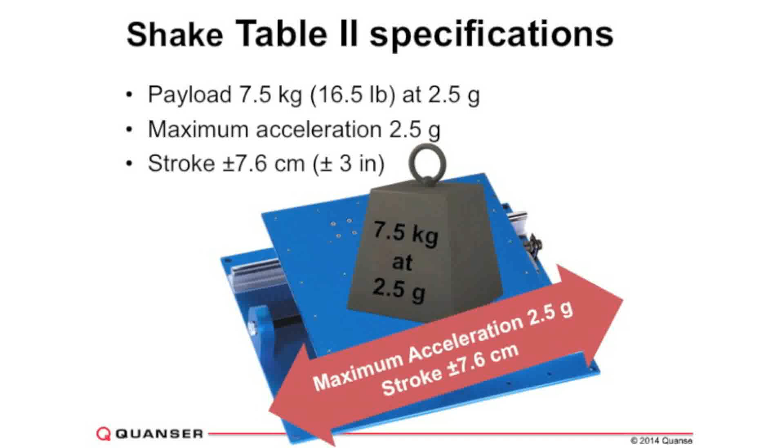And we have graphs that we can generate, based on the load you have, showing how much you can accelerate it, and so on. The stage stroke, so if I go down here, the stage, I'll just be moving manually, has a stroke of plus or minus 3 inches, so plus or minus 7.62 centimeters. So that's the stroke that you have.

The next item is the bandwidth. The bandwidth can comfortably go to 10 hertz. At small amplitudes, we can attain 20 hertz. So those are the top 3 specifications we get asked. So now I'll be going through the actual hardware of the Shake Table II. Mind you, this is a demo system, but the hardware is no different.

So we have a 400-watt 3-phase motor right here. So it's a very powerful system and it's ball screw actuated, so very robust. It's riding on 2 ground-hardened shafts, as we show here. In terms of sensors, we have an accelerometer that's mounted right here underneath the table. So it's an XY accelerometer that we manufacture.

We have an encoder that's embedded inside the motor. So the encoder gives you position feedback. And I believe the resolution is about 3.1 micrometers. So very high, very accurate position measurement. Next are the limit switches. So there are 3 limit switches on the table.

And if I take this to the left, then that will trigger a left proximity switch or limit switch. There's a home. The home is the center stroke position. And then we have the right. So 3 limit switches. And those are used for 2 reasons. They're used in normal operation. They're used for safety measures. So if you hit the left or right limit for some reason, then it will deactivate the amplifier.

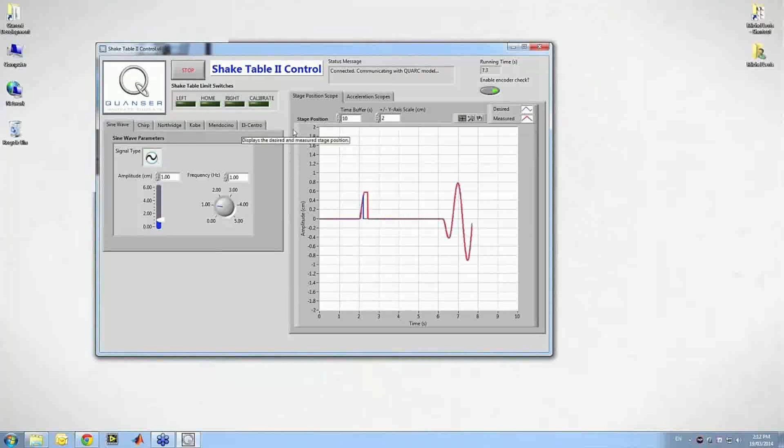All right, so let's begin with the first software option, which is the Shake Table II software. So I'm just going to load this up. It's just an icon you have here called Shake Table II software. If I double click on it, then it launches this graphical interface. So it automatically calibrates the system. By that I mean it automatically homes the system for you. So that's just another step that makes it easier.

As you can see, I can change the amplitude and the frequency of the sine wave. So I can decrease it and then start increasing the frequency, for example, to 2 Hertz. And all things are done in real time, where I can increase the amplitude. So these are things you can do as you're running the system. This is the position being shown, so it's showing the desired and the measured position. You can change the scale, the scopes, and so on.

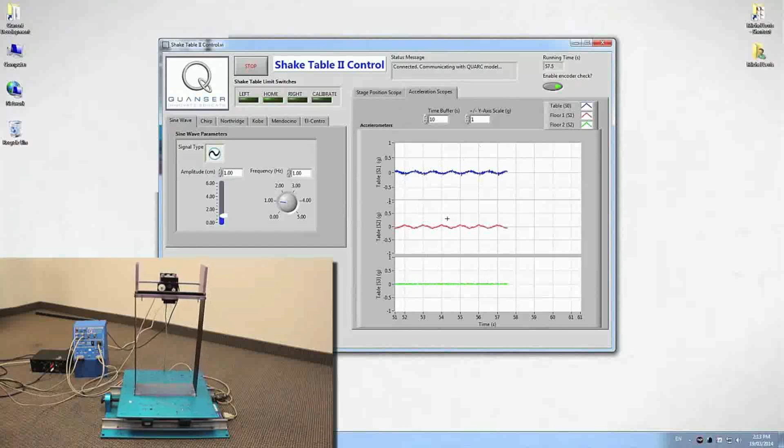We also have the acceleration measurements of the table and as well of any other accelerometers connected, including the structure. So the blue line here will be showing the acceleration of the table. So if I increase this a bit to like 2 Hertz or something, then you'll see that increase. And you'll see that the acceleration of the top stage in red increases as well. So if I decrease the frequency, it goes down.

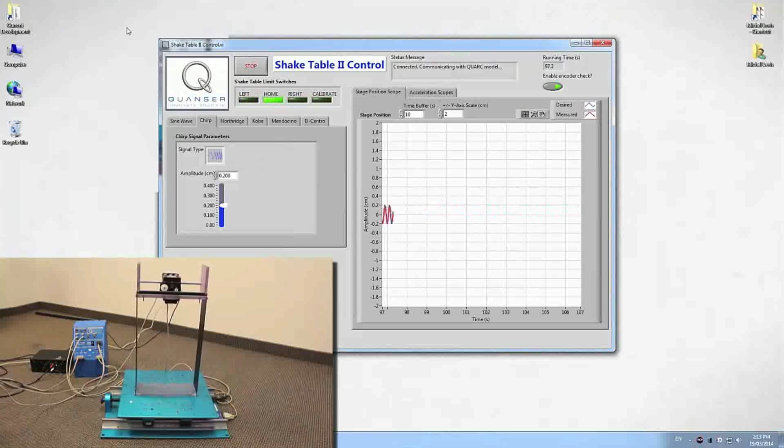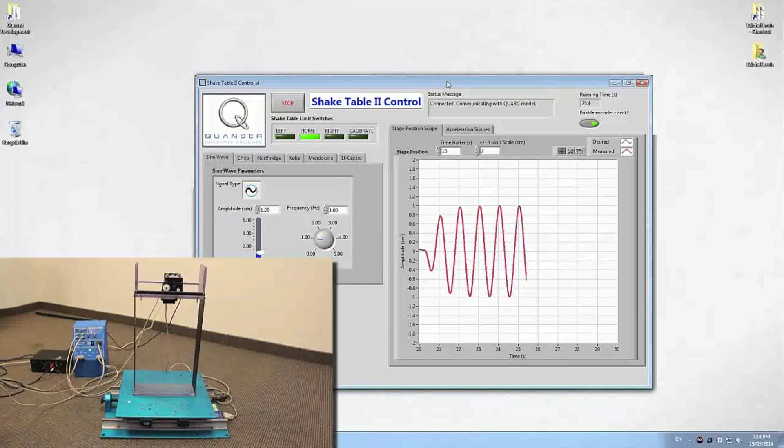Okay, so now I'll just restart that. So see, it calibrates it, makes it home, and then it'll fire up the Northridge system. So that's an example of an earthquake that's scaled down and fitted for the table. And if I go back to sine wave, then again, it'll make the smooth transition to the new signal and switch it off. And then I can click on stop, and the system in your lab is done.

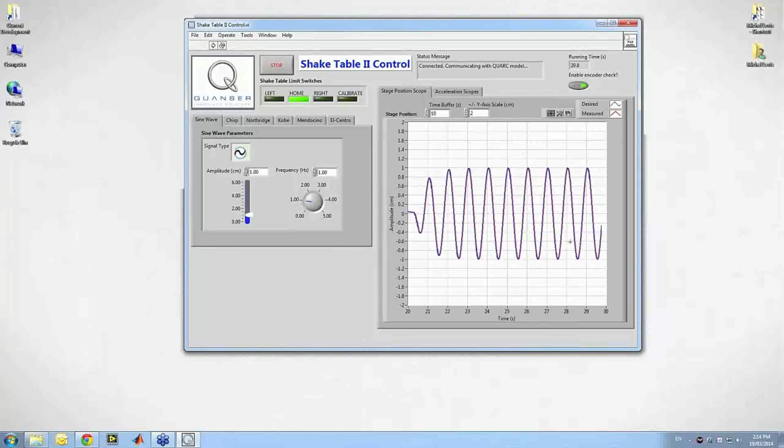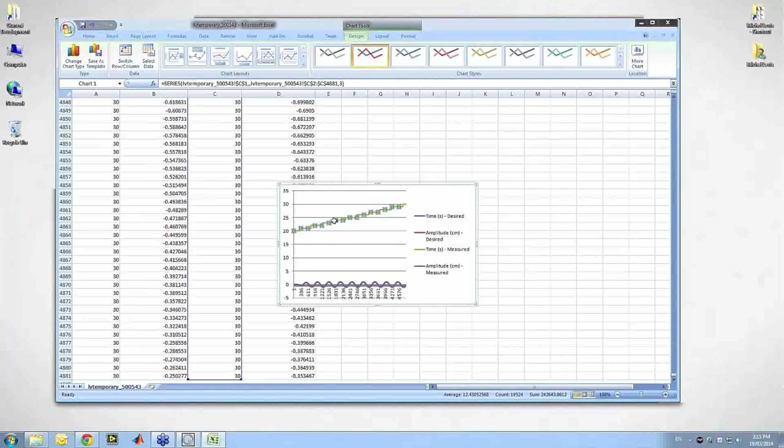So a couple of things here. If you do have LabVIEW on your system, then you can export this into Excel. So I can click on the position here and say export data to Excel, and it'll automatically just put it over to an Excel sheet. So then you can use all this data here, for example, and say, insert a line graph. Just delete the time here, and then see this shows you the data. So you can save data in Excel very easily if you have the full LabVIEW version installed. I don't think it does it with LabVIEW runtime only, but anyway, that's something to consider.

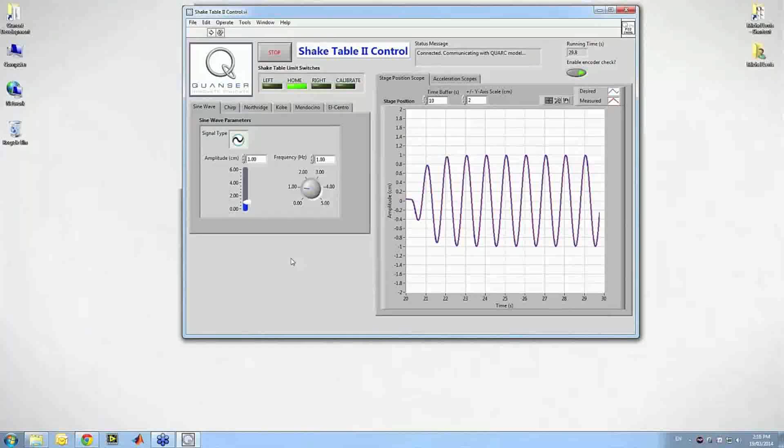So like I said, it does everything for you. It initializes the amplifier, it centers the stage, and it's easy to command different signals. What it can't do is, you can't add new earthquake simulations, you can't modify signals, and so on. It's a closed architecture type software. Now, if you want to do some modifications, that's where the MATLAB Simulink QUARC solution comes in, which is what I'll show next. But yeah, so that is the Shaketable 2 software. So I'm just going to close that, and then I'll show you the second method.

So this method is all based on MATLAB Simulink. Now I've trained a lot of people on the Shaketable system, and I find it's pretty much 50-50. Not everybody uses MATLAB Simulink. I guess it just depends on the institution. So if you haven't seen it before, then it might be a bit much, but I'll go slowly.

And hopefully, most of the controllers here are running in QUARC, so you don't need to know too much about MATLAB Simulink at the moment, but at least this will be an intro to you, so I'll try to give you a bit of a primer as I'm doing this, because I am aware that some people don't use it that much. So I'll just start over with the MATLAB Simulink.

So in option 1, we saw the software, so now I will show the MATLAB Simulink solution. And as I was saying, some of you might have been cut off with the audio. I'm aware that some of you may not be familiar with MATLAB Simulink, but that's fine. I'll try to do my best to give you a bit of a primer as I'm doing this. But basically, MATLAB is a text-based mathematical language.

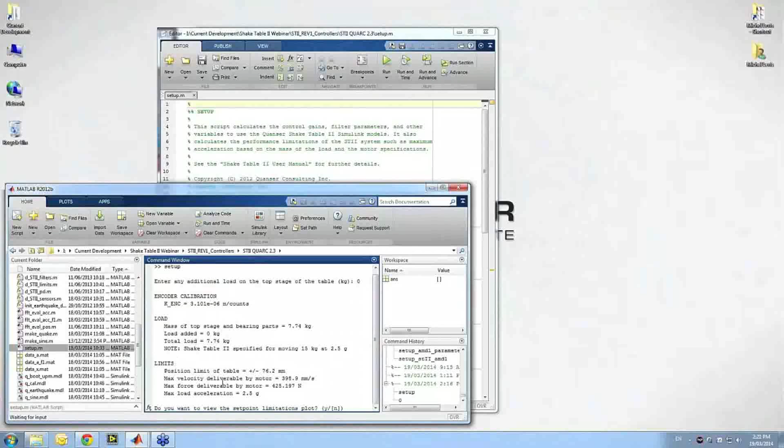you entered, for example. If I click on yes here, if you want to view the set point limitations, so by set point limitation, that means basically it's the bandwidth, right? So the bandwidth based on the payload, what position can it command, and at what frequency for a sine wave. So if I maximize this, then it shows you what acceleration you reach depending on the command you give. So the blue line is the limit for the position, the red line is the limit for the velocity, and the green line is the acceleration limit. So I'll just maximize this again.

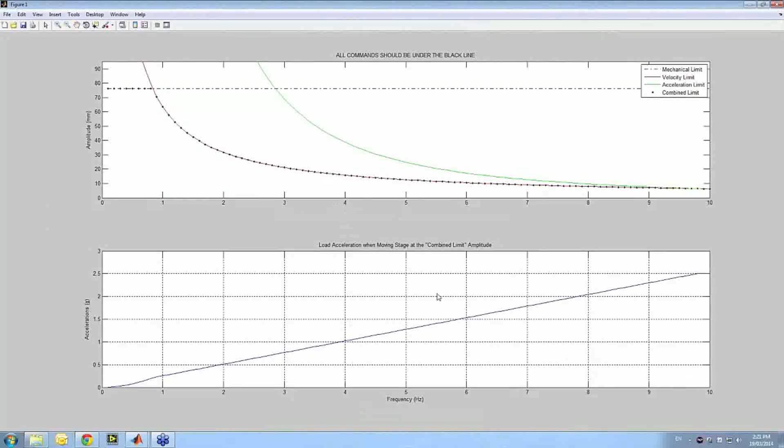So this is Simulink, the block diagrams that we use. So again, all these files are supplied with the Shake Table system. And the nice thing about this is, if I double click on here, these blocks here are actually made by us. So this is part of the Quanser software. So QUARC works with Simulink. It's quite seamless, but what it does is we add some blocks to interface to our hardware, but it also allows you to generate code from the Simulink diagram and run hardware. So those are 2 key things that it does.

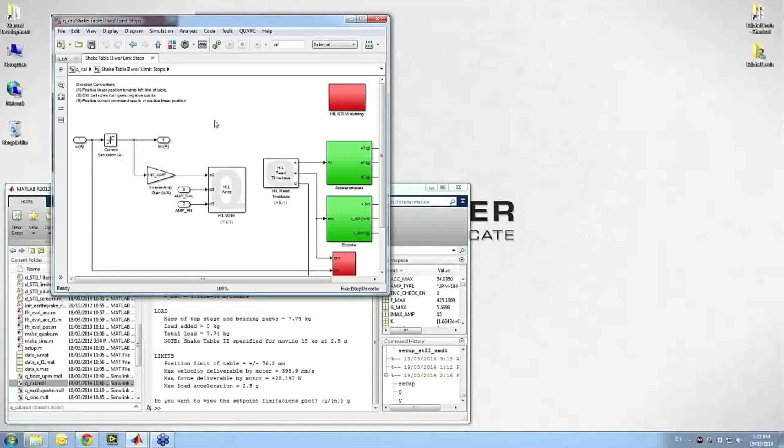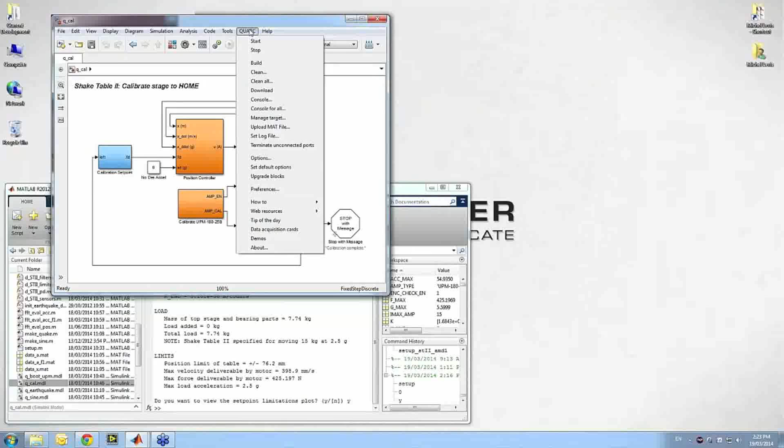Simulink is a great environment for modifying controllers because it's more concept based and all that. So if you want to change the signals, it's quite easy to do it in this platform. But for now, let me just show you how you would calibrate the table, how you would center it using this approach. So the first thing you gotta do is you go to the QUARC menu. This is another thing that gets installed automatically once you have it set up on your system. So you go to build. So what that does is it generates real-time code from your Simulink diagram.

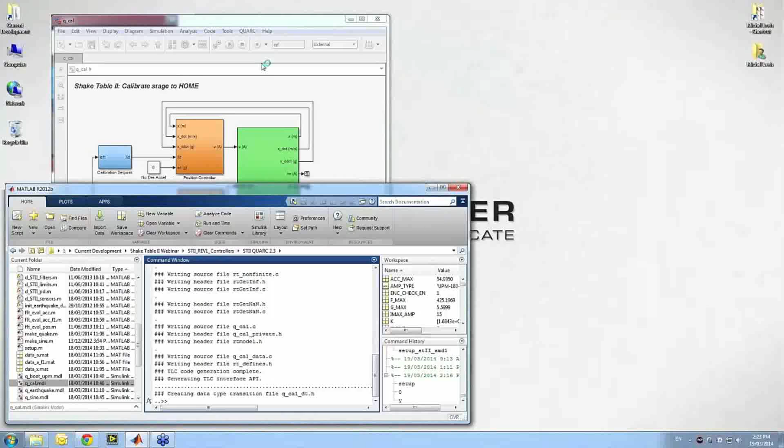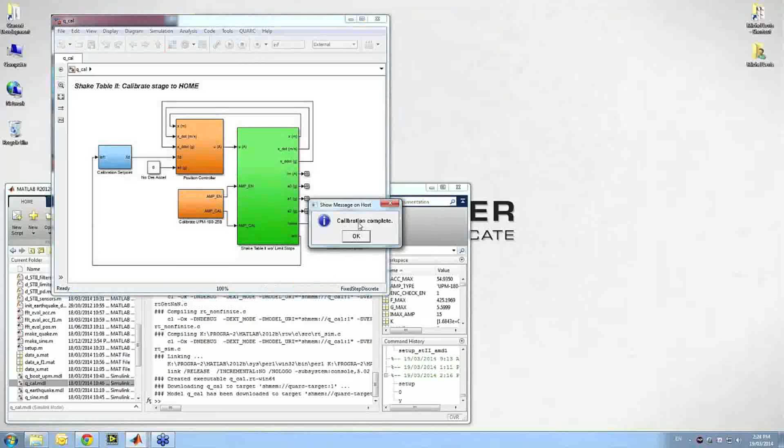You'll see in the MATLAB prompt here, generating code, and it'll go through the different prompts, and at the end it'll say downloaded controller. So it's finished compiling, and there. So model QCal has been downloaded, and now we can run the controller. Because right now it's not actually home, so I can go connect to target and start, and then it'll go over here and center the table for me, and then it'll prompt a message saying calibration complete, and so that's good.

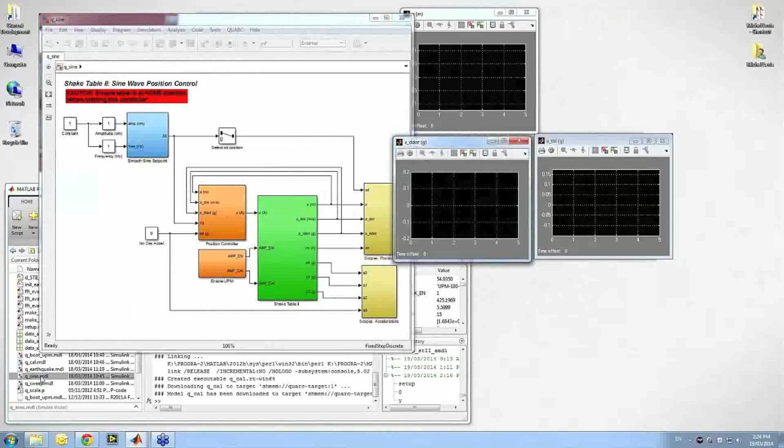If you didn't do that and you try running another, like the sine wave controller, it will prompt you to say, hey, make sure you center your stage before running this controller. So it has all these safety measures embedded inside. So let's open QSine. So this commands a sine wave to the stage. So this is handy for different reasons, right? Because most people want to supply a sine wave.

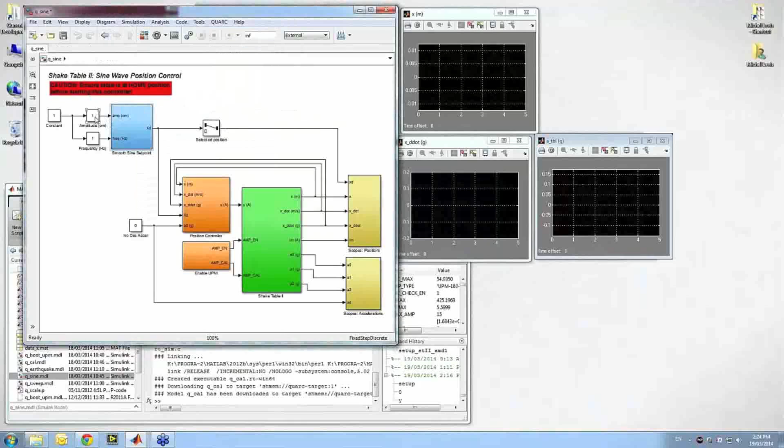But again, the sine wave in here, if I double click, here's a sine wave. So you can easily change that to say a square wave. If I go here and I say square or triangle, then you could do that. And of course, we would have to change the amplitude and the frequency of that different signal. But just showing you how easy it would be. So I've already built this controller. I've already generated the code, so I can just go and start. And there we go.

So just like in the software, I can go ahead and change my amplitude to 1.5. Or I can change it back to 1. Change the frequency. So all the same stuff I've done in the software, I can do through this, but it's a different interface, and you have that capability of modifying the diagram if you want.

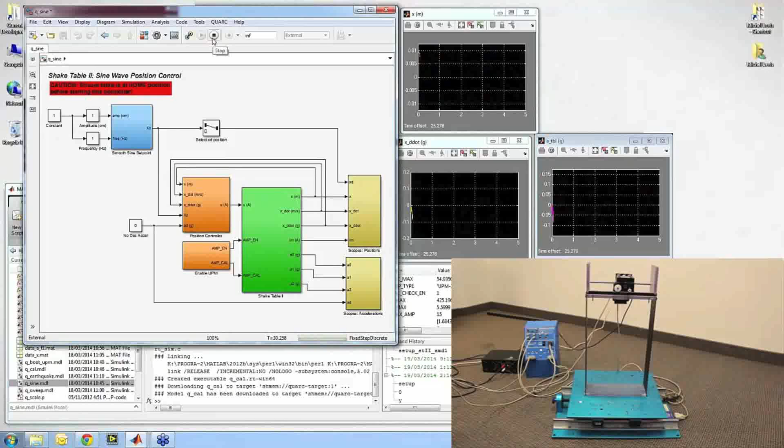The other thing is also you have scope. So here I'm measuring the position. This is the acceleration of the tables. This shows the acceleration. It's pretty low right now, so it's not showing you a great amount. And then when you want to stop the controller, you just simply click on stop.

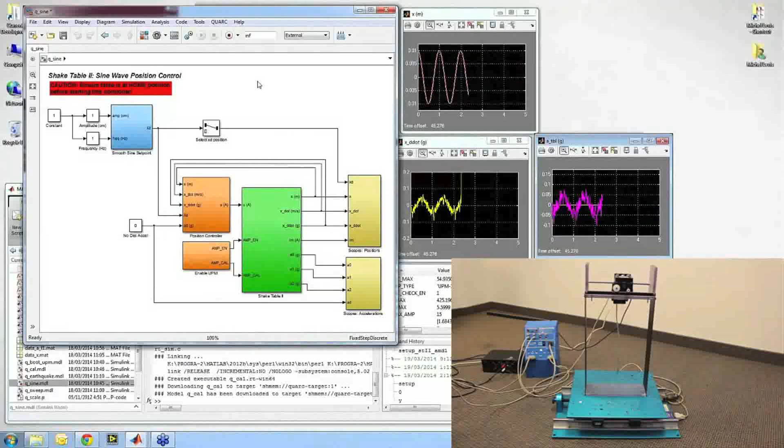So that's the sine wave. So I'm going to click that. I won't save. Now the next one. So we've already kind of touched on these different controllers. The next thing I want to show is actually how you can save data in MATLAB. And as I was saying, actually I will probably save that until later. Right now, maybe I'll show you the earthquake and how you can simulate different earthquakes.

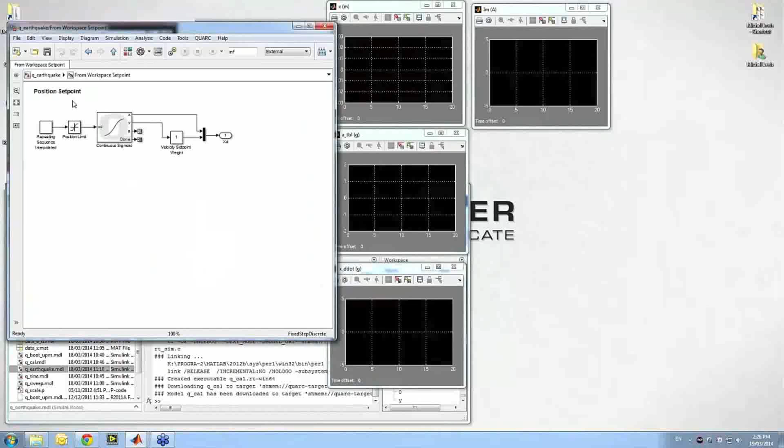So inside, we have a diagram called Q earthquake. So Q earthquake, remember the sine wave. The sine wave here had a sine wave command, but in here we supply earthquake data. And this is how you would do it. So you could log on to, for example, all this information, all this data.

So as you can see here, for example, NGA number, these are all acceleration records that we've downloaded from the PEER Strong Motion website. So what you do is you go to this website here, PEER Ground Motion Database, and you would download an unscaled acceleration record from a certain earthquake that was recorded at a certain station. You download that and you get a file sort of like this. So this is the file that has a certain format.

All the accelerations are in gravitational units. So this is an actual record, for example, of Northridge taken at this station here, Sylmar Hospital. Now, this earthquake record has large displacements. The shake table has a limited displacement of plus minus 3 inches. So we need to scale down the system to the displacement of the table.

So the way you can do that is using this here, the make quake. So make quake here, if I run this, I'll just run it right now. So here I've selected the Northridge, so input file name, I've inputted the acceleration record that I downloaded. So SYL090, this is the Northridge earthquake that I showed you on the website.

So you input the file name, and then you enter what is the maximum displacement you want. In this case, I put 1.5 centimeters. You could go more than that, you could go up to 3 or 3.5 centimeters if you wanted to. But right now, I'll just limit it to 1.5. And after you run it, you get this graph here. So this graph shows you the earthquake acceleration that was recorded and the earthquake position.

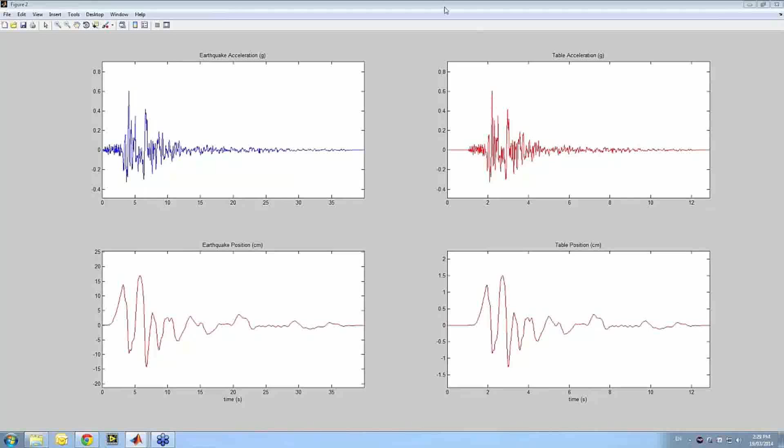So your record doesn't last as long because the time is shrunken, but the acceleration is maintained, and the displacement is reduced. So I'll close down that graph. I'll close down this. Go back to my diagram, and I'll just go ahead and start the system. So there we go. So this shows you the Northridge. And then control and finish. So it automatically stops after the control is done.

Now let me show you an example. Let's say I want to change the displacement to 2.5, and I want to use a different earthquake. So I would go to this earthquake here that I downloaded again from PEER, and I would run it. There we go. So that's a different record. So let's run this guy instead.

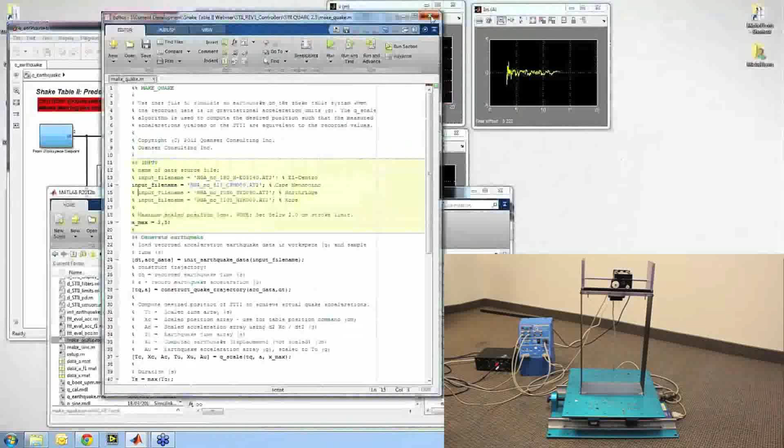So because it's a different set of data that I've loaded, I need to rebuild my controller. So I need to go back to QUARC and say build. Because something significant has changed, you need to rebuild it, but subsequent builds don't take very long. There, so we're done. Then I can go QUARC and start.

There you go. So it tracks that position, and then you get the measured acceleration here. So that's an example of how you can simulate different earthquakes using the Q scale and the Q earthquake.

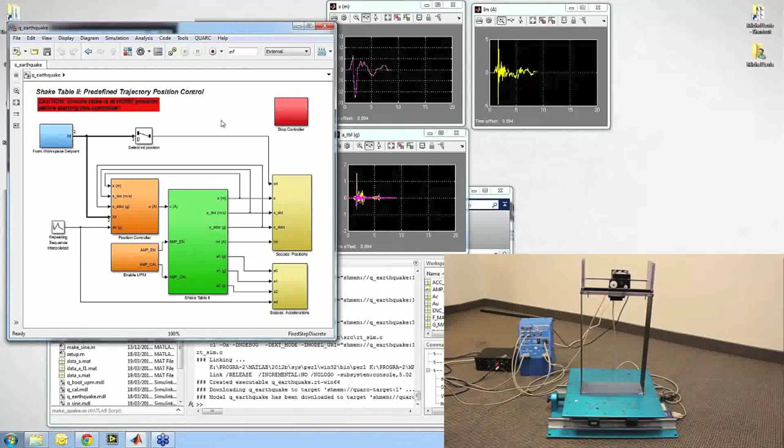So that's something very common that people want to do. Now the other thing that we can also do is save large amounts of data in MATLAB. So if you want to calculate, for example, the FFT to find the natural frequency of the building.

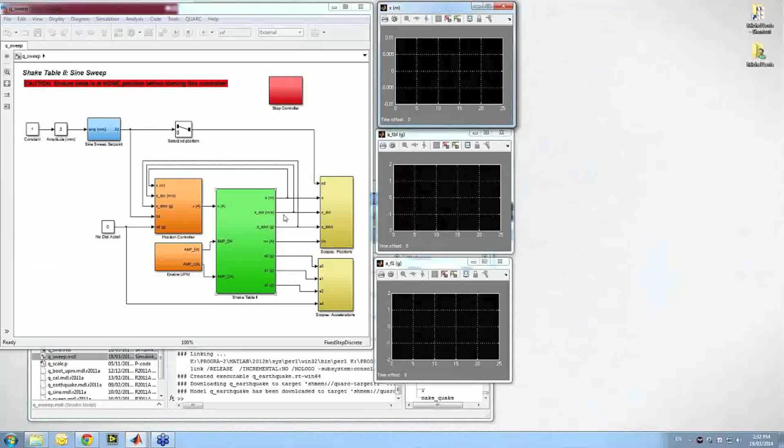So let's try to do more of a focused example. So I'll go to QSweep. QSweep will feed a sine wave. And if I go to accelerations here, I'm actually saving, you'll see here, A1 stands for floor 1 acceleration in G. So I've got a little block that, again, this is a QUARC block, and it saves all the acceleration data of the floor to a type of file called MAT, a MAT file.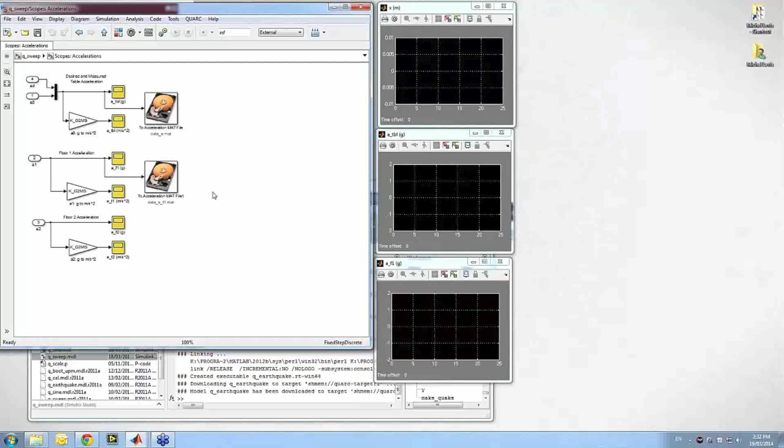So that's a MATLAB data file, and it's basically like a spreadsheet. It's good for saving large amounts of data. So during the whole course of this controller, it's going to save the acceleration data to this file, and then I can use that for offline analysis. For example, to find the natural frequency. So let's run this guy.

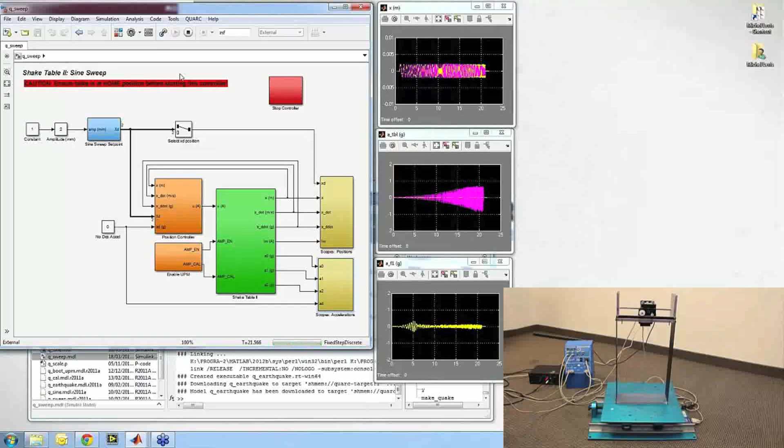So the sine sweep, I believe, goes up to 10 hertz. So it goes from 1 to 10 hertz. And then it automatically stops. Just to verify, I can go to my block here. So go to sine sweep command and the chirp here. Yeah, so it goes from 1 to 10 hertz.

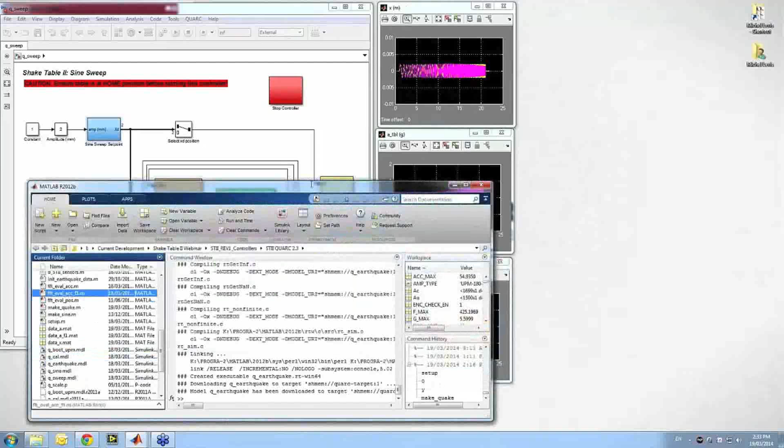So I've ran all this. Here's the acceleration of the table. Here's the acceleration measured of the AMD, the first floor. So all of this has been saved. Again, these are files that we make. So what's good about MATLAB is you have a command called FFT that does all the computation for you. You got a bit of post-processing to do, but not very much.

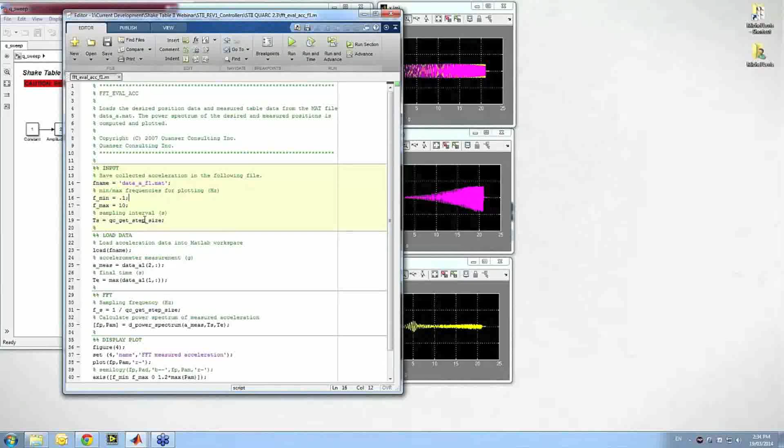So this is a script that we supply. You just supply the acceleration data file in here, the min and max frequencies you've used, and the sampling rate of the controller, which is actually 500 hertz, by the way. All these controllers are running at 500 hertz. You could boost them up to 1 kilohertz or even 5 kilohertz if you wanted to, but for our purposes, 500 hertz is plenty. So if I run this guy, it shows you the FFT.

So you can see the peak here. Here's my natural frequency. Just to zoom up, you can see it's a little over 2 hertz, a bit less than 2.5. Now it is a bit on the higher side because I had the cart on there, and it wasn't tied down. So the cart was allowed to freely move, and that actually adds passive damping to the system.

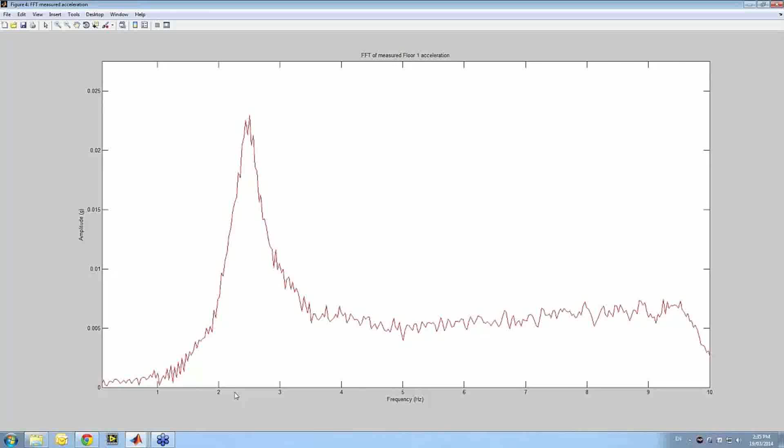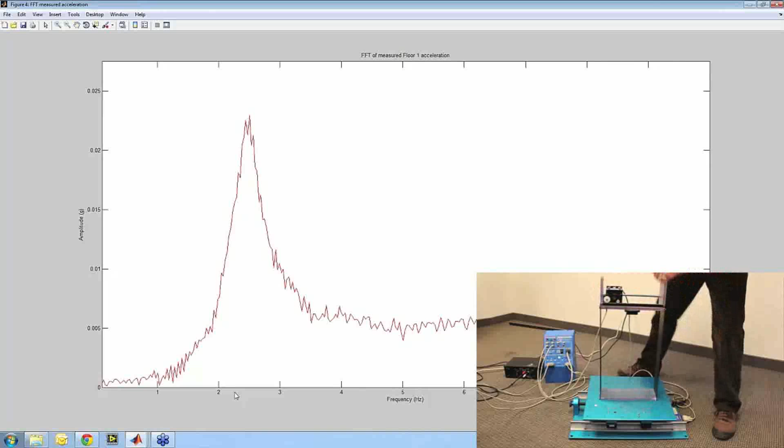So if I ran this again and actually constricted the position, so if I bring this up here, just tie it down. I'm just going to use a twist tie. I'll hold it a bit, but yeah. So I just want to constrict the position slightly and rerun it. And then we can see the effect of it. We should see a change.

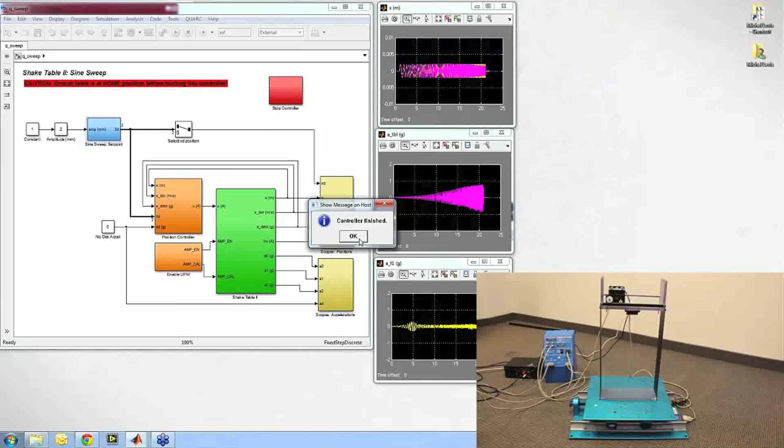There. So now you can see the cart was moving less, so that should change the profile of the building. Okay, there we go. It's done. So now I'm going to go back to MATLAB. I'll rerun the script here. So I'll open this, run it. See? So now the frequency is a little bit different. It's dropped down just slightly, maybe 0.1 or 0.2 hertz.

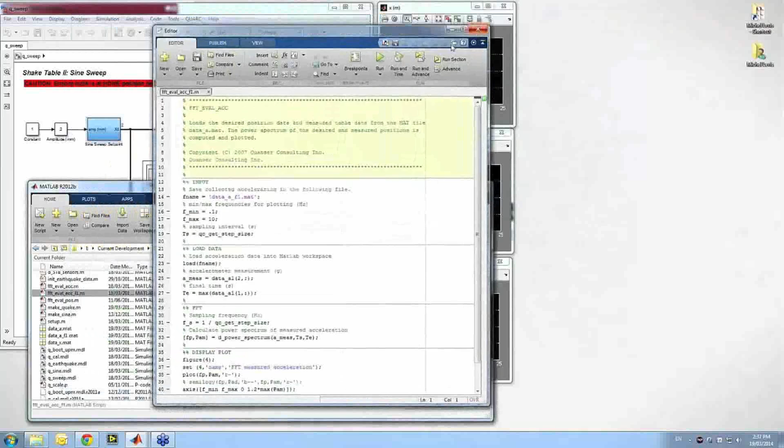So there's an example of easily finding the natural frequency of the building. It's something that's commonly done in structural dynamics, for example. So remember that value. We got about 2.2 or something. That will come in handy later. So the last demo I'll be doing is with the active mass damper system.

So we haven't actuated the cart at all. We haven't been using the cart yet. So in this one here, again, I'm going to run the setup script, and I'm going to load up the assembly diagram. So the assembly diagram here is for using the Shaketable 2 system with our active mass damper. We have different types of mass dampers, by the way, our smart structure. So I can remove this now.

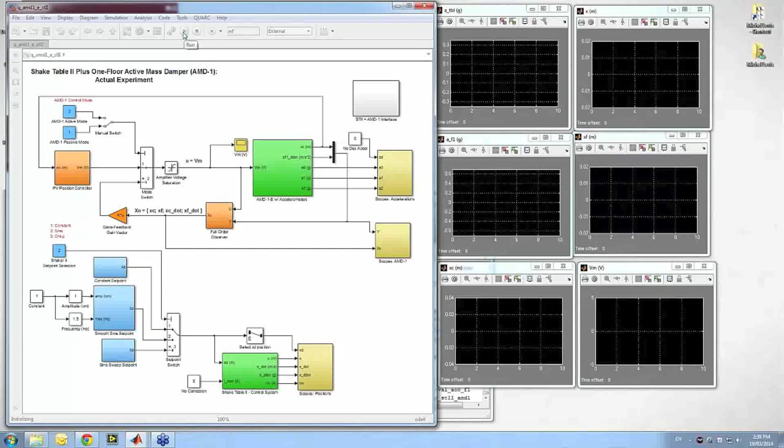So we have the 1 floor and we have the 2 floor. Of course this is the 1 floor AMD. So now what I'm going to show you is the difference of having no active compensation and having it on. So I'll start running this controller. Right now it's going to be on passive mode. What I mean by passive mode is the cart is locked into the center position right now.

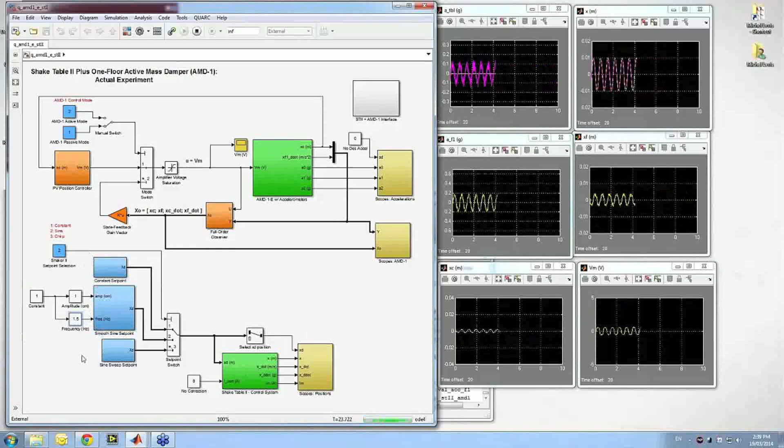So this is, again, with no damping, and as before, I can go ahead and change the frequency of the sine wave of the table. In the bottom half of my screen here, this is my Shaketable control. So if I increase the frequency of my sine wave closer to the natural frequency I had, which is like 2 point something, if I go like 1.95, you can see the acceleration is quite high.

So right now I got acceleration of almost 1 G. So yeah, I've reached 1 G. So I'm just going to change the scales here, for example.

And I'm just going to close some stuff down. So the primary thing we're looking at here is this here. So this is acceleration of the top floor. So again, if I go back to 1.95, this is getting close to natural frequency, right? So note this value and note how much it's moving on the webcam.

So I'm going to bring it down to 1.6, and now I'm going to activate the cart. So when I activate the cart, now you see the cart moving back and forth. So now it's actively trying to compensate for the motions of the structure. Let's go back to 2 Hertz. So now the acceleration is attenuated by about half. Like we were reaching almost 1, and now we're down to about 0.4.

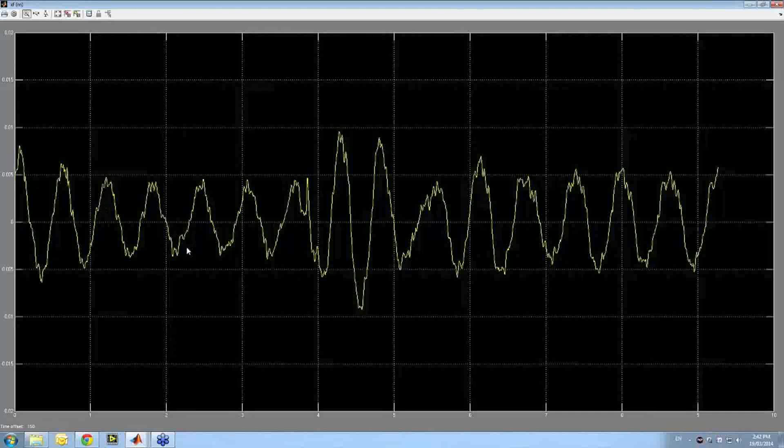I'll just stop that. So the way it does that, I had some other scopes here that I want to show you. So this is the position of the cart, and this is the estimated position of the floor. So this here is actually an observer that estimates what the displacement is of the top floor. It does that by using the cart position and acceleration of the floor, as well as acceleration of the base of the Shake Table. So by using those 3 signals, as well as the voltage being applied to the cart, you can estimate what the displacement is of the top floor.

And using that estimation, that gets fed back to a closed loop controller on the cart, and then it tries to minimize or mitigate that position that's estimated. So by trying to regulate that position down to 0, you effectively attenuate the acceleration. So that is basically the logic or the algorithm behind the active mass damper system.

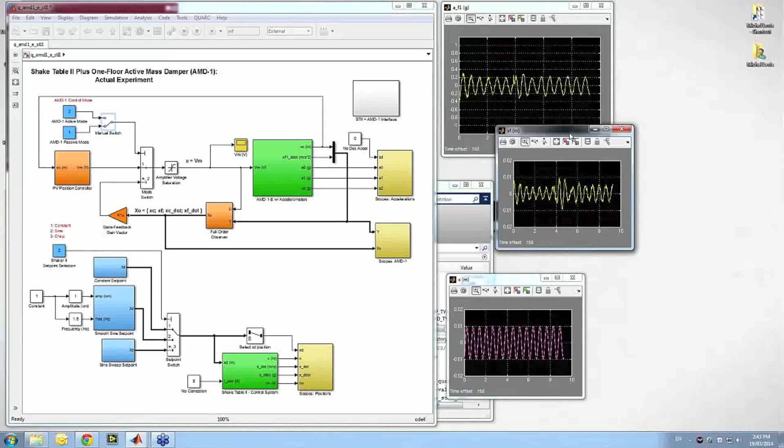So this is one way to do it, like the smart structure with active compensation. Of course, in a lot of buildings, it's usually using passive compensation. So I have seen some people that, for example, run a sine sweep without the cart, just a structure. And then they would mount a heavy pendulum, and then run the same signal through the table, and then students can observe the effect of the acceleration change and stuff like that. So I have seen that as well in some universities.

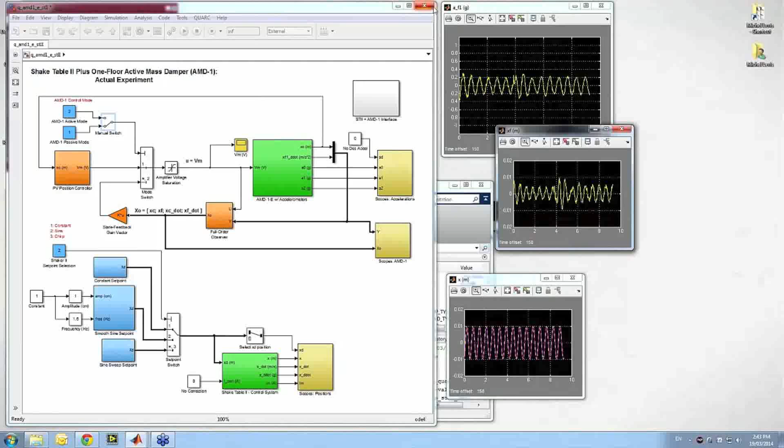Okay, so that concludes most of the Shake Table 2 demos that I want to give. The only thing I want to leave off with is, so this is one solution, the Shake Table 2. We do have other tables. So the Shake Table 2 is our most popular product, but we also have this. It's called the Shake Table I-40. The -40 stands for the stroke. So this one goes plus or minus 20 millimeters. It's spec'd for moving a 1.5 kilogram payload at 1 G.

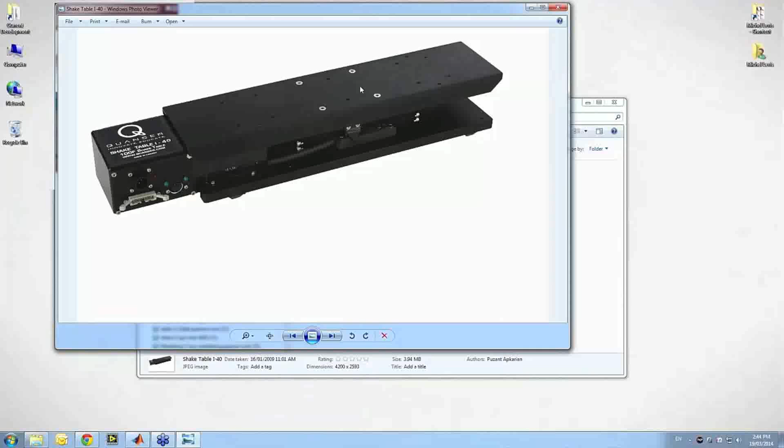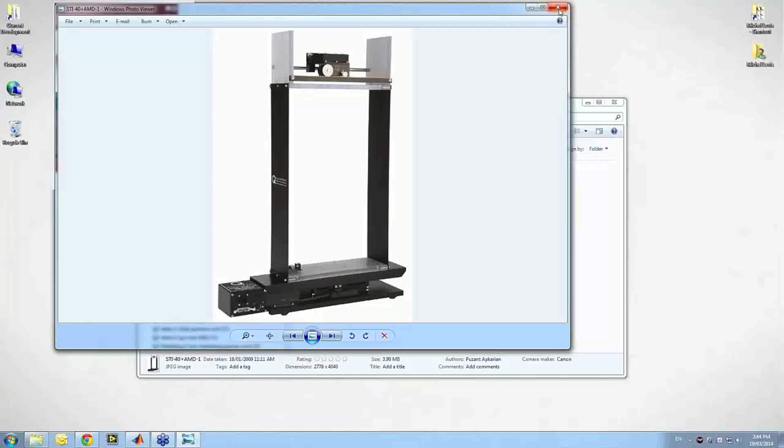This is our most portable solution. You can also mount an AMD on it as well, just like we have on right now, and conduct the same experiments. It's just you have a bit less stroke and less power on the system, but it's more portable. And you can connect it to a laptop if you wanted to, because it doesn't use the larger Blue amplifier, so you can run this off a laptop. So that's on the benchtop side.

We have the Shake Table 2, and then we have the Shake Table 3. So the Shake Table 3 looks like this. This one is a dual axis system. It runs on linear motors. Shake Table 2 is ball screw. This is linear motors. It also has very high accuracy encoders, an accelerometer. And this is usually used more for advanced teaching and research, or if you have larger structures. It's spec'd to move 100 kilograms at 1 G. And the stroke is 10.9 centimeters, so a larger stroke as well. So this is a very, very nice system.

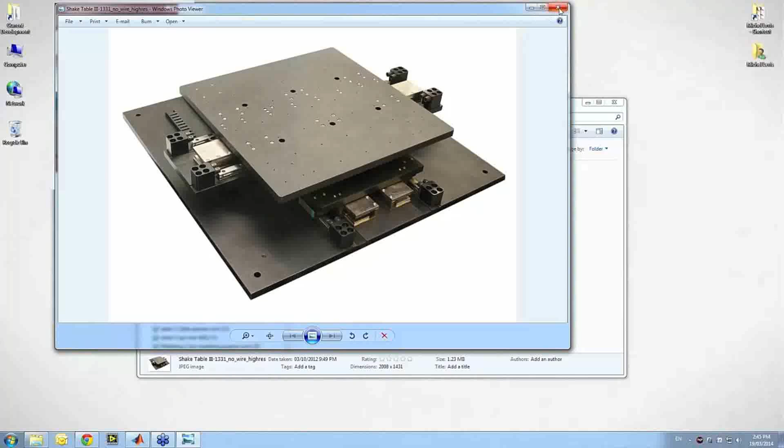Last remark is you can actually mount two Shake Table 2 systems perpendicularly to have XY motion. So you can have one Shake Table 2 mounted on another Shake Table 2, and have XY motion. So that's another solution that people have used as well, and we have full compatibility, full support software and documentation for that configuration.